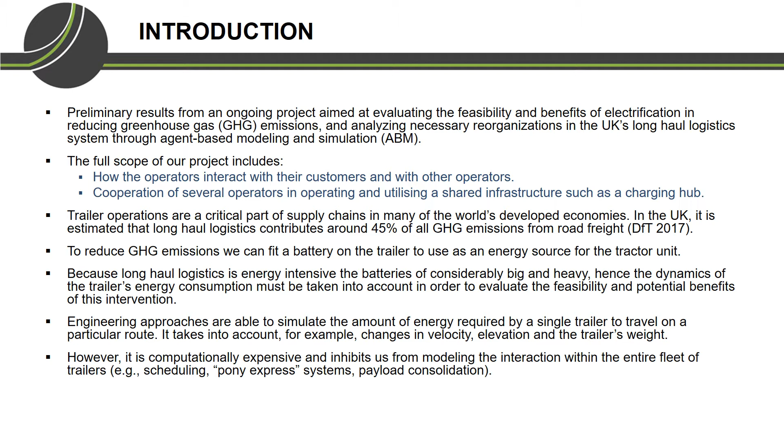So our objective at this phase of the project is to propose a suitable approach for modeling representative energy consumption in agent-based model. And we do this by developing a meta model based on Goeke and Schneider to estimate the energy consumed by the tractor unit and the trailer per kilometer, and then to evaluate the benefit of electric trailers for long-haul logistic operation. This is done by incorporating the meta model into an agent-based model that represents the operation of a UK trailer operator.

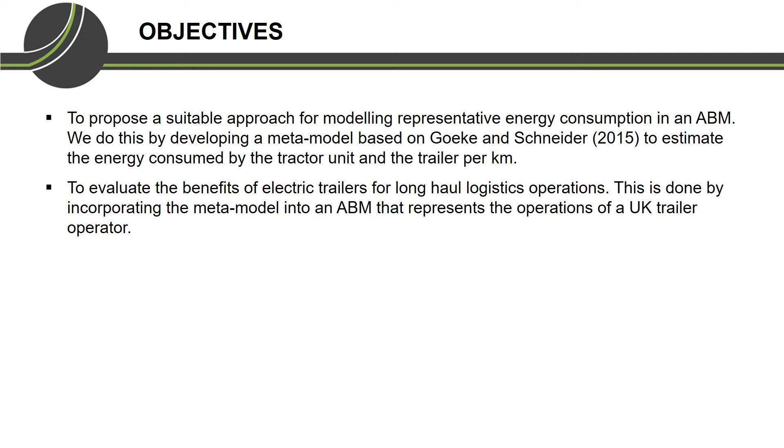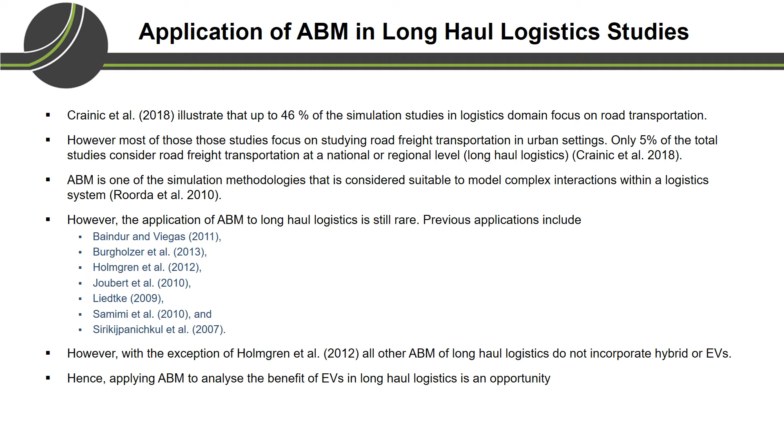Road transportation is a popular application for logistic simulation studies. However, very few studies focus on long-haul logistics, especially studies that employ agent-based modeling and also consider electric vehicles. With regards to agent-based modeling studies of electric vehicles, most of them focus on passenger vehicles and not commercial vehicles. And in most studies, the energy consumption is taken into account as an average number.

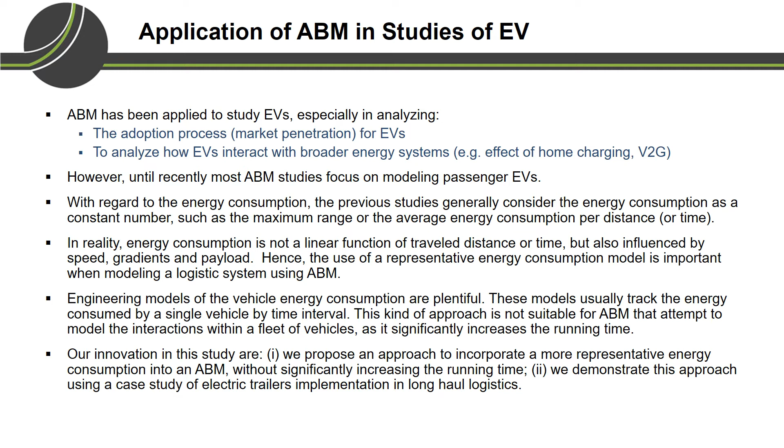Even though engineering models of energy consumption exist, we cannot use them in agent-based model because it will require a long running time. Therefore, in this study, we try to propose an approach to incorporate a more representative energy consumption into an agent-based model without significantly increasing the running time. And secondly, we demonstrate this approach using a case study of electric trailers implementation in long-haul logistics.

In this presentation, I will demonstrate how we develop an agent-based model of a UK trailer operator, how we develop an energy consumption model for the trailer, and how we use the agent-based model to evaluate the benefit of a new electric trailer concept.

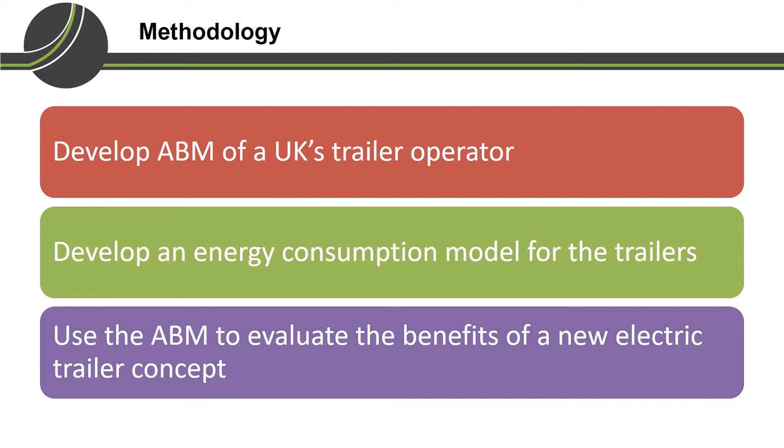In our agent-based model, we have three types of agent. The first one is customer agents. This includes companies or stores who generate pick-up or delivery orders to the trailer operators. The trailer operators then assign this pick-up or delivery order to one of its depots or warehouses, and then the warehouse will select the vehicle to do the pick-up or delivery.

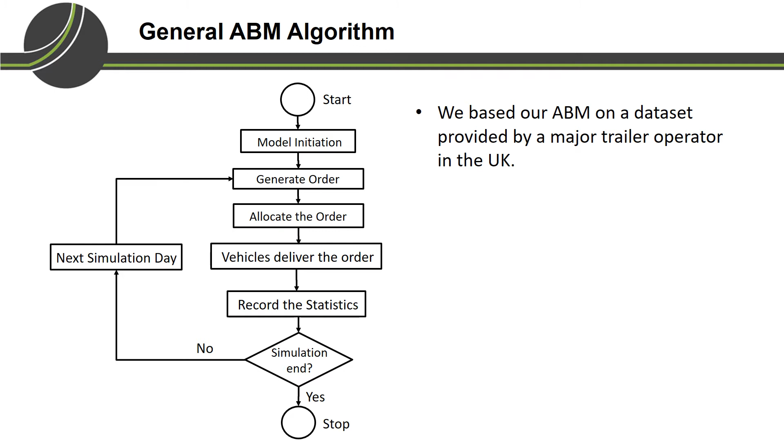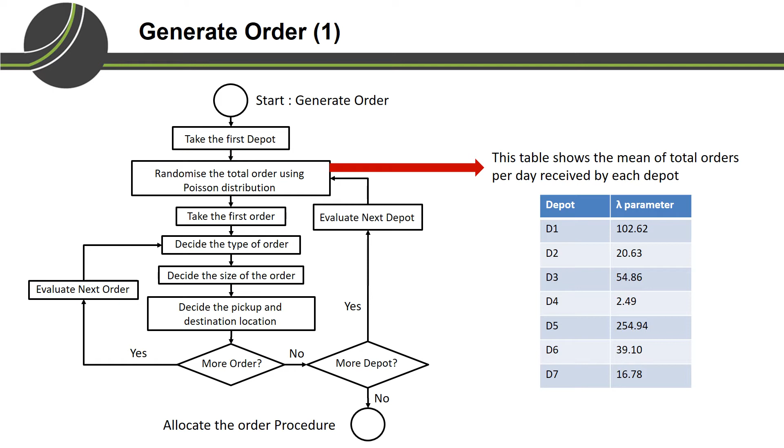To develop our agent-based model, we use a dataset provided by a major trailer operator in the UK, and this is what happens on each day in our simulation. A simulation day starts by randomizing the total orders received by each depot operated by the trailer operator. An order can be ambient, cold, or frozen, and the proportion of each type of order is determined based on the empirical dataset.

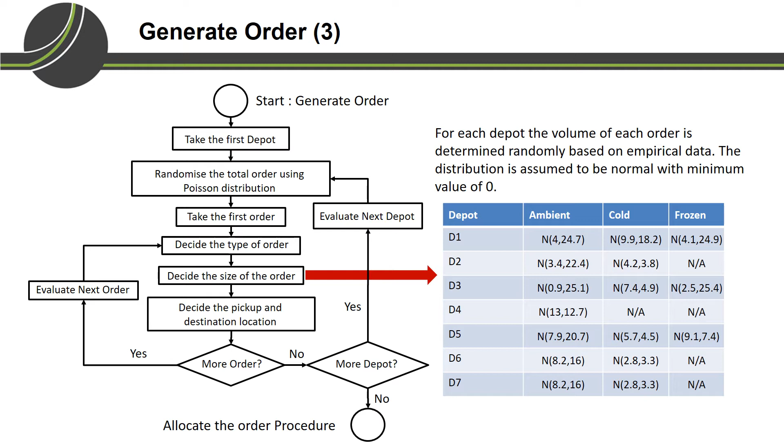After that, we decide how many pallets are in an order, and this is also determined based on the empirical dataset. And finally, we decide the pickup and delivery location of each order. These pickup and delivery locations are extracted from the historical order data from the trailer operator.

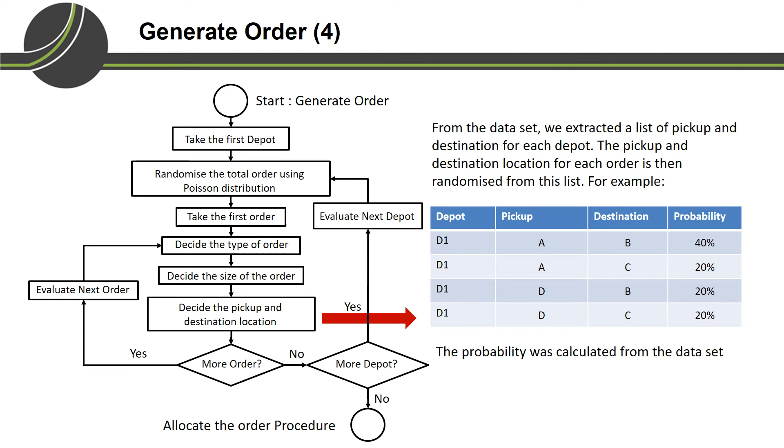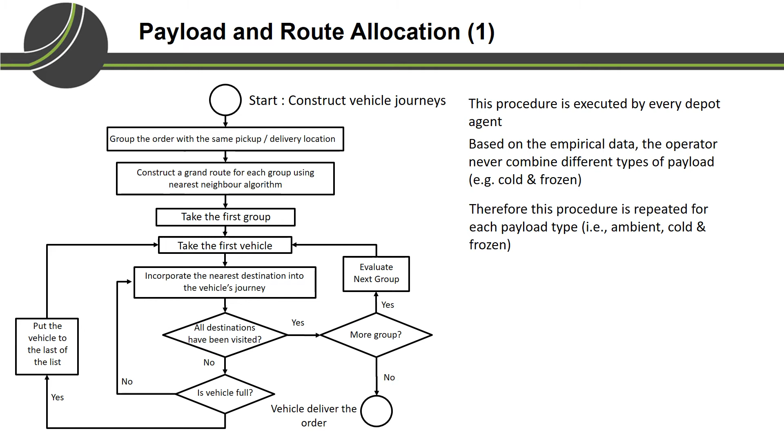Once we generate the order, then we must allocate this payload into vehicles and the vehicles into routes. This procedure is executed by every depot agent. The payload and route allocation procedure starts by grouping the orders with the same pickup location. This is to avoid multiple vehicles visiting the same location.

After that, we construct a grand route for each group using the nearest neighbor algorithm. We then start by using one vehicle and incorporate new destinations to each journey until its capacity is full. If one vehicle is not enough, then we assign another vehicle to serve the rest of the destinations.

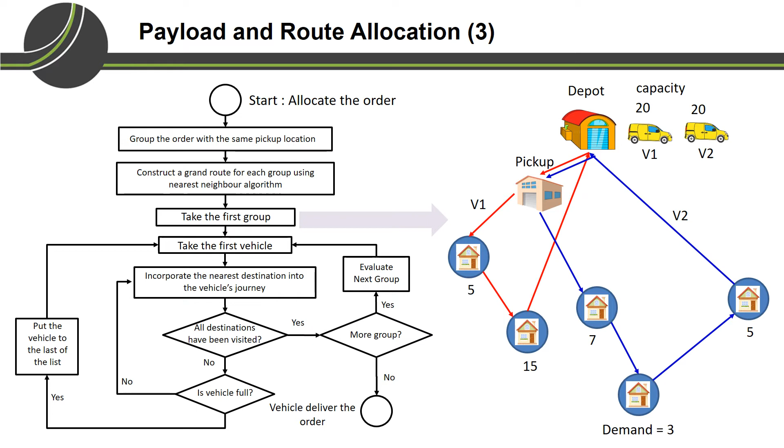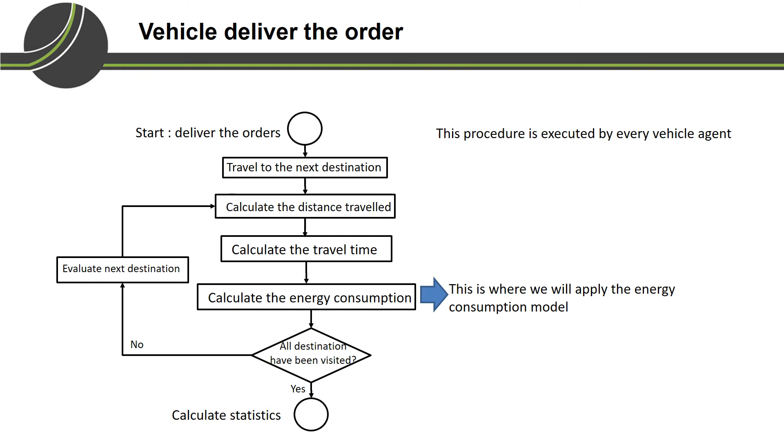After we allocate the payload and the routes, each vehicle agent will deliver the order. During its journey, it will calculate the distance traveled, the time traveled, and the amount of energy it consumed. This is where we will apply the energy consumption model. This is the screenshot of our agent-based model, and it's run on the AnyLogic platform.

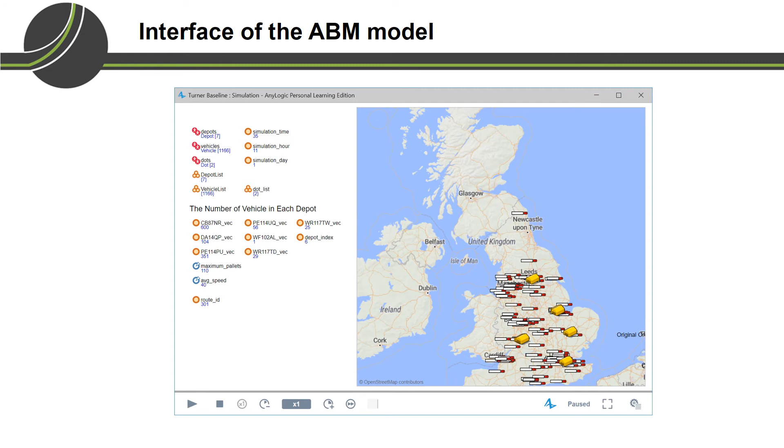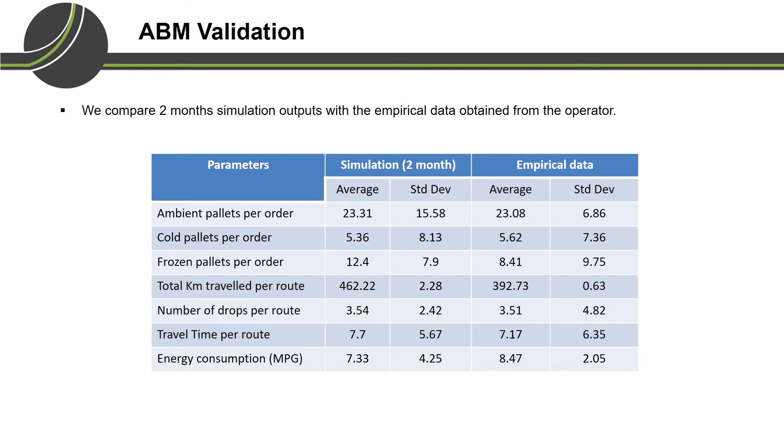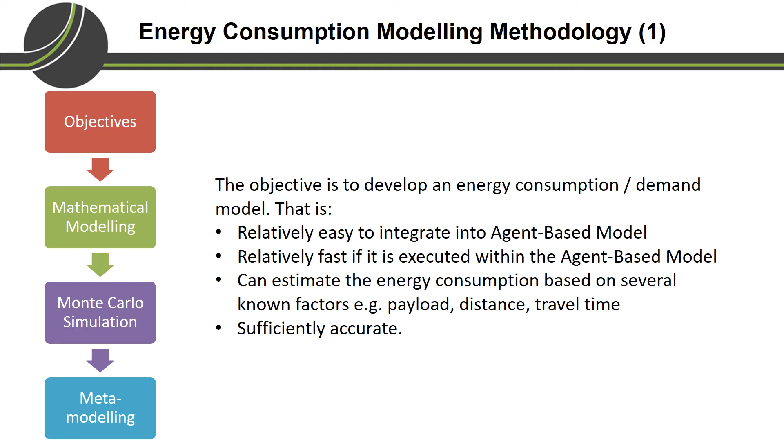The next step is to develop an energy consumption model for our simulation. Our objective is to develop an energy consumption model that is relatively easy to integrate into the agent-based model, relatively fast if it is executed within the agent-based model. It should be able to estimate the energy consumption based on several known factors, for example, payload, distance, travel time, and also it must be quite accurate.

We began by developing a mathematical model of mechanical power required to move the vehicle. This mathematical model considers the vehicle speed, the air resistance, the vehicle mass, the road gradient, the rolling resistance, and gravitational force. We then convert this mechanical power consumption into electric power consumption and fuel consumption rate.

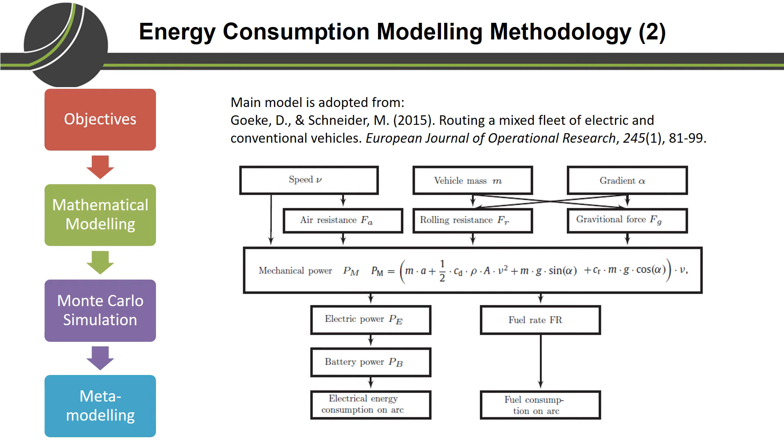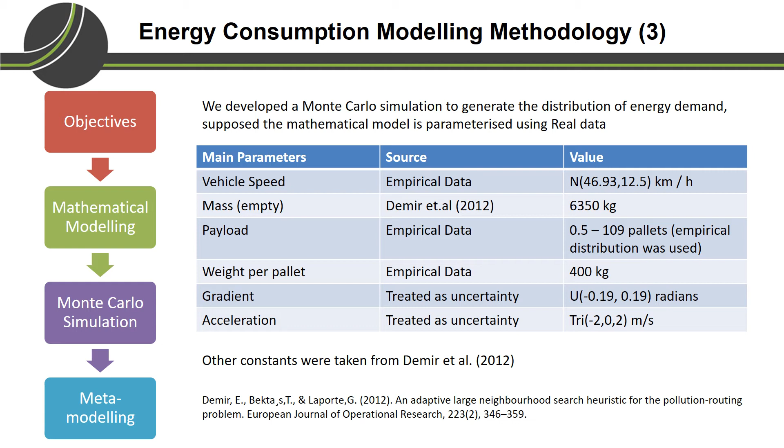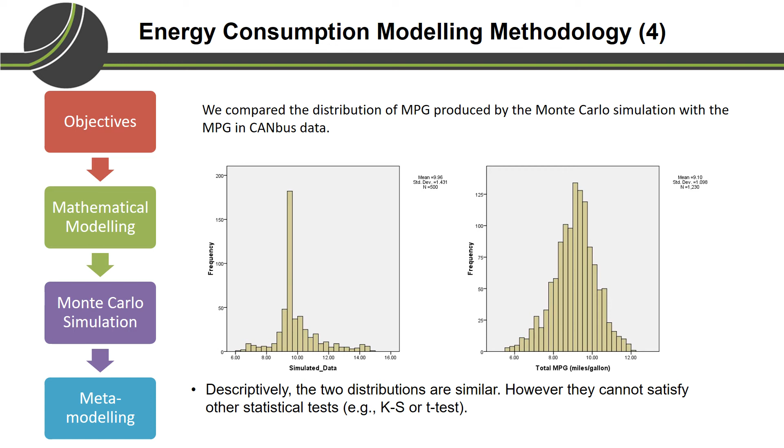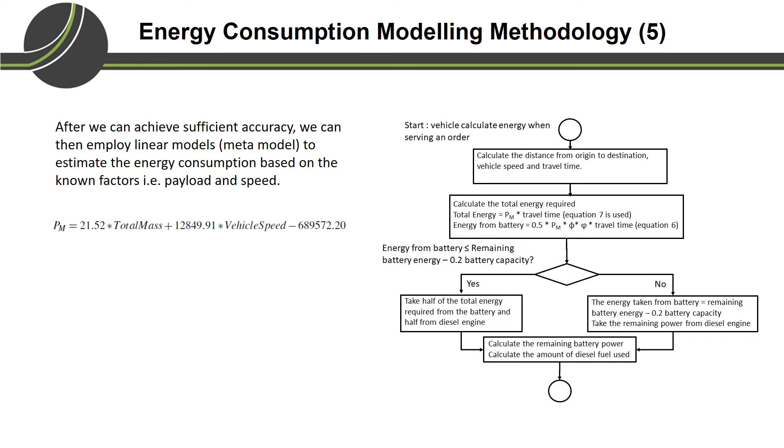We then develop a linear model to estimate the mechanical power required and use it in our agent-based model. Here, we assume that as long as the trailer battery is above 20%, half of the mechanical power will be taken from the battery and half from the diesel engine. However, if the battery power is less than 20%, then the trailer will move using the diesel engine only.

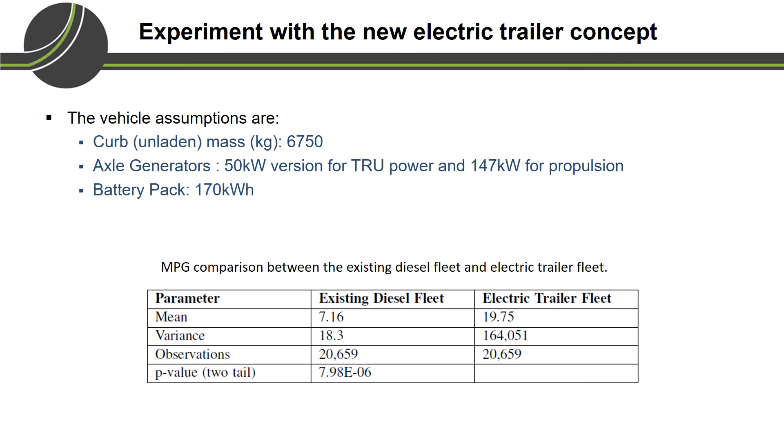Finally, we use our agent-based model to evaluate the benefits of a new electric trailer concept provided by one of the UK trailer manufacturers. The battery pack of the trailer is 170 kilowatt hours, and this table summarizes its benefit. If our operators keep using their old trailer, then 1 gallon of diesel fuel can only be used for 7 miles. But if they use the electric trailer, then 1 gallon of diesel fuel can be used for 19 miles.

So the conclusion of this presentation is that we have proposed an agent-based model of long-haul logistics operation, and we have used it to evaluate the potential benefit of electric trailers. We have also proposed a method to model energy consumption with sufficient accuracy without significantly increasing the simulation runtime. And we have incorporated electric trailers into our agent-based model and shown that their use is very beneficial in reducing the amount of fuel consumed by the operator.

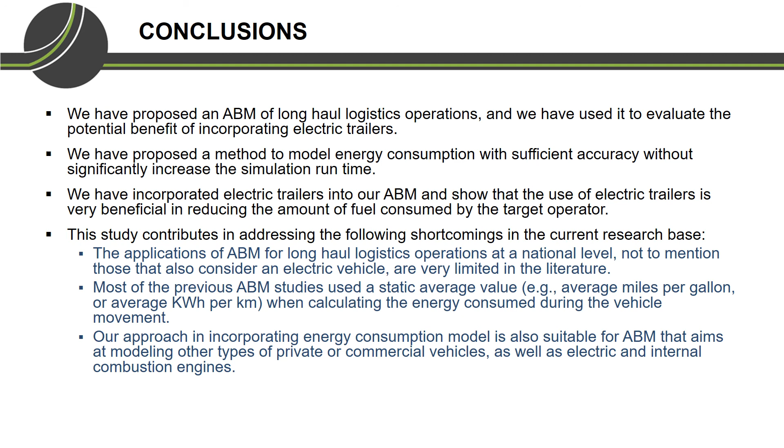Our future research will include incorporating acceleration and braking events into our energy consumption model. We also aim at integrating a congestion model into our ABM. We are also interested in analyzing other interventions such as electric road systems or the Pony Express system. On top of that, we are developing a specialized modeling platform that can handle large-scale ABM efficiently, and a design of experiment method that can efficiently produce robust solutions.